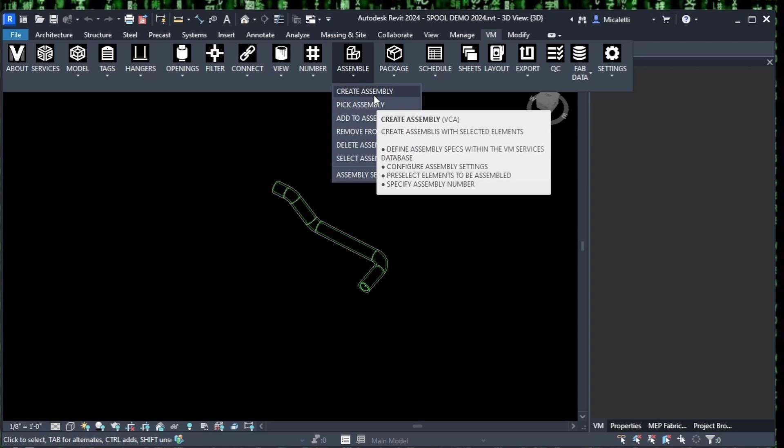VM does give you some more tools here. You can create assembly, and that's just box stuff, and create assemblies out of boxes. Pick assembly allows you to just pick along the run, and then it'll create assemblies for you. You can add to assembly, remove from assembly, delete, and select, and then there's some assembly settings here.

Now, what this is asking you is, what do you want the VM assembly tools to do? Do you want them to make proper assemblies, or do you want to make parameter-driven assemblies? There'll be more parameter-driven assemblies in here next update, but right now you can make a sub-assembly, and this is not really an assembly, it's a parameter-driven assembly, which is useful for certain things.

I accidentally escaped out of that. Let's go back. We're going to make proper assemblies for now. Now this is include taps. So when you're picking along the trunk line, do you want to include the taps without picking them? And for ductwork, generally you do. If you're making assemblies out of ductwork, you probably want to cut the taps in and manifold them, so that's checked. Exclude end couplings. This is basically field welds.

So when I pick two ends of pipe and then I keep going on to the next one, the weld between the two assemblies, leave those out. That's a field weld. That's what this checkbox does here. Also, assemblies are assemblies. They're not spools, so you can make assemblies all day long, but when you make MAJs, CADmep, CAMduct, and ESTmep, they don't know what an assembly is. But CADmep, CAMduct, and ESTmep does have a value called spool name.

So with this box checked, when you're creating assemblies, it's going to push that assembly name to the spool name. So now CADmep, CAMduct, and ESTmep are aware of your Revit assemblies. And then as you're creating them, you can override fill color and stuff like that, so you can visibly see where you've been and what you've spooled.

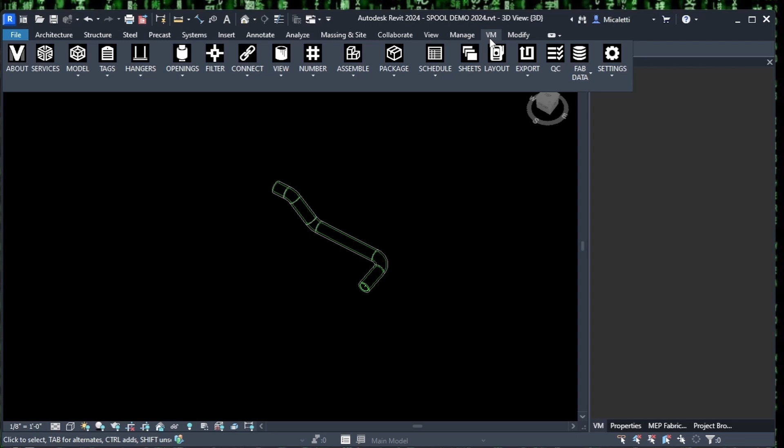So now that that's done, remember I set a max of 10 pounds. And for assemblies, this is dry weight. We also do hanger loads, which I can show you later if you want. But hanger loads is wet weight for pipe, so that's also important to know. We're going to go ahead and create an assembly. We're going to pick assembly, and this is process cooling, we'll say. So PC1. We'll start with PC1. Select OK.

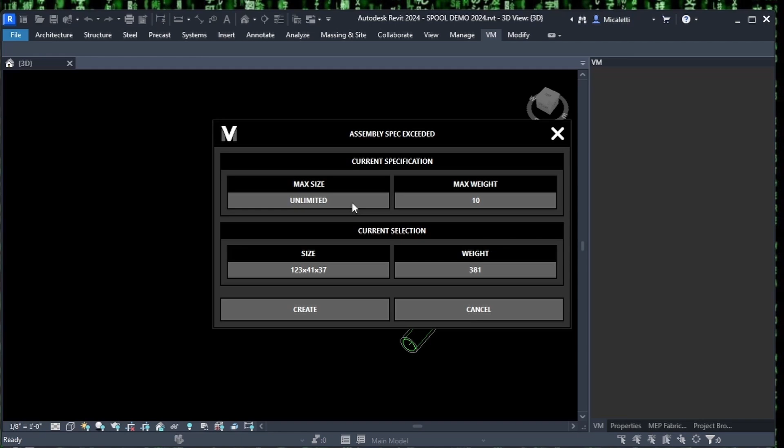We're going to go from here to here. Now, assembly spec exceeded. We're getting this warning because max weight we said was 10 pounds, and it's saying that this is 381. What do we want to do? This would also trigger on size; right now our max size is unlimited. It will give you the size. This is 123 by 41 by 37, in inches. We didn't set a max size, but we did set a max weight. So it's giving us a warning here, and we can create or cancel. We're going to go ahead and create.

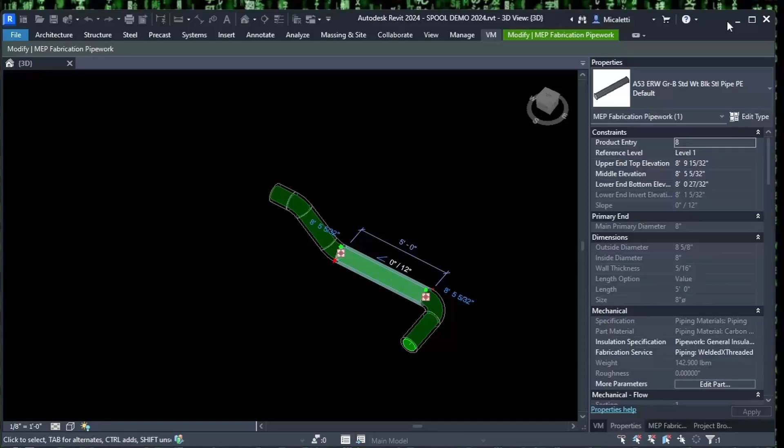Okay, and I could continue picking down the line if I wanted to, but I just hit escape. And if we look at this, we can see that's made PC1. Now let's turn off that ridiculous weight. 0 is unlimited. So we're going to go ahead and say that. And let's make some duct spools now.

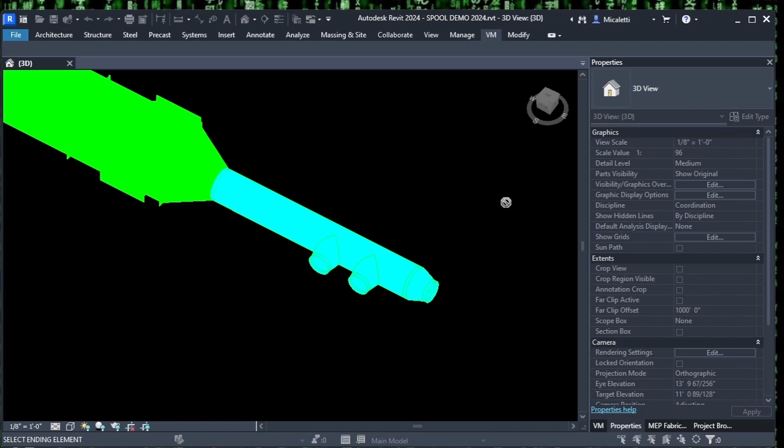So now that that's done, we just need to make some sheets. So what we can do here is select pipe, come up to the sheets. The first thing it asks is, what do you want to make sheets for? So we can make sheets for our proper assemblies, and then remember the parameter-driven assembly. We can make sheets for those.

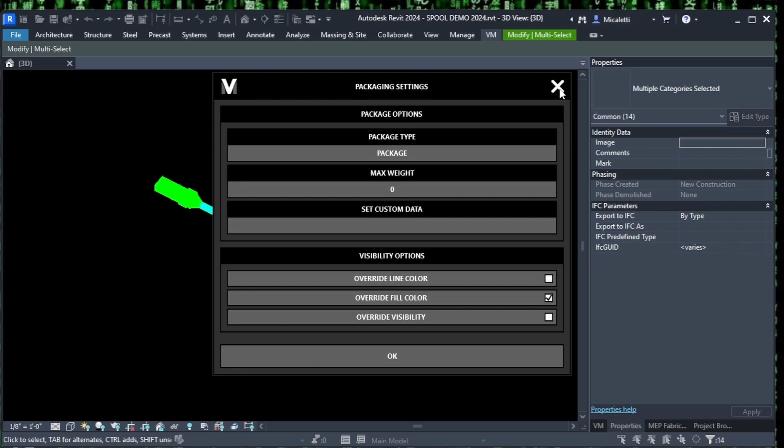And then we have packaging tools as well, which are similar. We have assembly and then package, and these are similar, and you have some packaging options here as well. And sort of a package is just some portion of some model. Could be a riser, could be a chase, it could be 10 spools, whatever you want.

This gives you a way to package up your project and organize it really quickly, and then you can create sheets out of packages. You can select single packages and all kinds of cool stuff there. But we're going to go ahead and select this. Go to sheets. We do want to make a sheet for an assembly, and there's lots of setup here, but basically you can create as many views as you want, and you can create as many schedules as you want for each sheet, right? And then you can set up sheet titles and stuff like that.

Select your title block. This is just the title block family. Your company's standard title blocks will be here if they're loaded into the model, and you can pick them here. Now, once this is all set up, say this company does our process cooling like this, and then we save the template. So we're going to go ahead and load our process cooling template. So the people who are spooling, they don't have to set this up. They just need to load it, load the company standard, right? So this is process cooling.

And we can actually edit the sheet parameters here. Approved by, checked by, designed by, drawn by. These are just parameters that come out of the box for sheets, but you can add more parameters to sheets. And if you did, they'd be here. And you can set your own custom parameters for sheets here, and it'll set all those. So say you're driving some fancy stuff on your title block based on these parameters, set them all up in here, and your title block will be all nice the way that you want it to work. Prefix and suffix are not necessary.

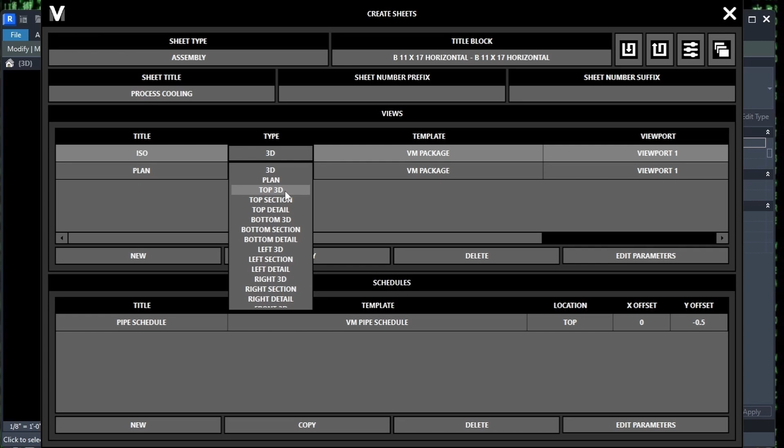Now you can absolutely just use sections and details and stuff like that. But also, if you did want a top view, you can use the top 3D view. So you're getting a plan view, but it's still got all the flexibility of a 3D view, right? If I wanted to plan ISO. But here I'm just going to use a 3D view for the ISO. And this is the view template. Now this is very important. This is just the standard view template.

This controls basically everything. What is the scale? What is the color? What is visible? And if you're familiar with view templates, it's all here. Now I do have one out of the box made specifically for these spools, and you will have as well. So I'm going to pick that. And then viewport, this is just a viewport family. What does the callout look like? Do I even want to see a callout? This is the one that comes out of the box, and there's only one in the project, so I only have one option here, but you will have more if you have more viewports.

And then the next thing is, where do we want this on the sheet? So I want it to line up with the left side. The left side of this view, I want to line up with the left side of my title block. And then I want to offset 2 inches. If you're using metric, this would be millimeters. Y offset 0. And so that's my ISO view.

And then I'm going to have another plan view, except I want it to be top view, but I'm going to use a 3D view. Same template, same viewport, except this time it's going to line up with the right. We're going to offset -2. So that's real easy. And once you get the hang of it, a lot of people, they like to just make a bunch of views and then just line them all up with the bottom right corner, and then they pick the view, right? And then I want to use this view for this spool or this view for that spool.

You can absolutely do that. You can do 100 views and pile them all on top of each other and delete them when you decide which exactly view that you want. So there's that. And views also have parameters.

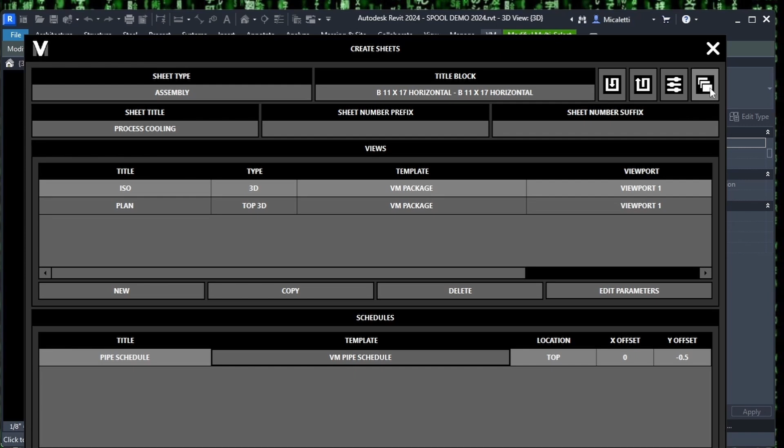Delete that. And then the same thing, what's the title, which template? I want to use the VM pipe schedule template. And where is it? Top of the sheet, the 1/2 inch offset. And now that that's done, if you remember, I pre-selected, so we can just create the sheets.

It has created the sheets for us. If we go to Project Browser, Assemblies, we can see we have the spool assemblies that we made, but no sheets. But then we did create sheets for this. There's that. There's the 3D view. There's the plan view. There's the schedule. And here's the sheet. That's set up exactly how we wanted it to be. Might want to move this down.

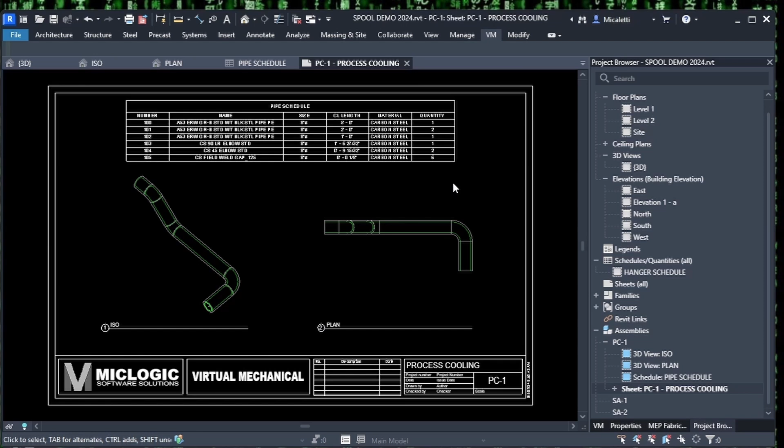So now what I can do is go ahead and detail this real quick. I'm going to select this view, come into here. Now this is process pipe. Say I don't want to number welds, come up here, just give me the pipe work. Now there is no welds in here.

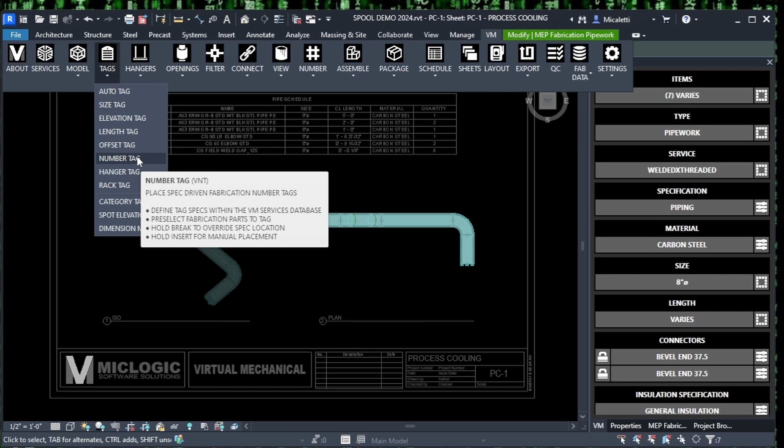Now say I didn't like that. One of the things that we can do is, so that was the spec driven tags. But say I wanted to override. So what I can do is select all this again, give me just the pipe work. Now the override key, it'll tell you here under tags.

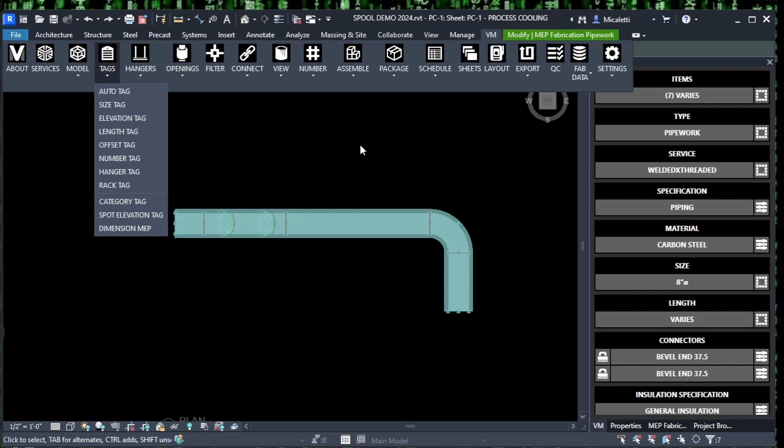There's another tag. So it says hold break to override spec location, right? So what I'm going to do is hold break, pause break, and then type VNT, VNT. And now it's going to ask me, okay, well, where do you want them? This time, put them on the center above with the 2 inch offset.

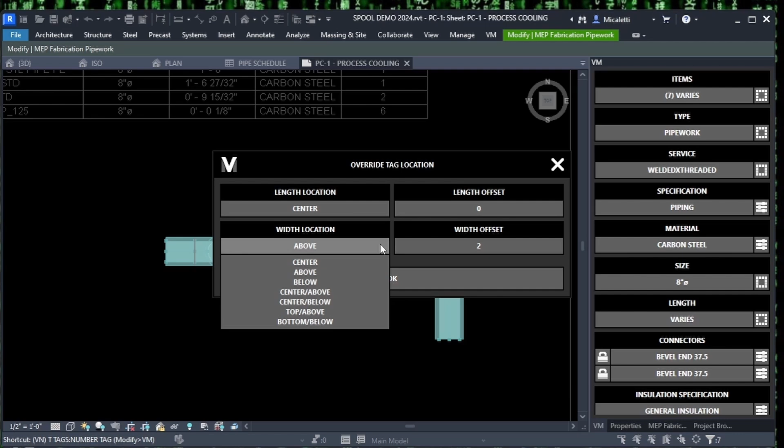Great. Okay. No, don't like that. Undo. Select. Let's go. Pipe work. I'm going to hold pause break. V and T. Give me below. Below center. That's fine. Okay.

We're done with that. Let's click out of here. Double click into here. I'm going to unlock this view. Now, one of the things that we do, it's almost impossible to do out of the box, is to dimension multiplanar spools. But VM enables you to do that real easily.

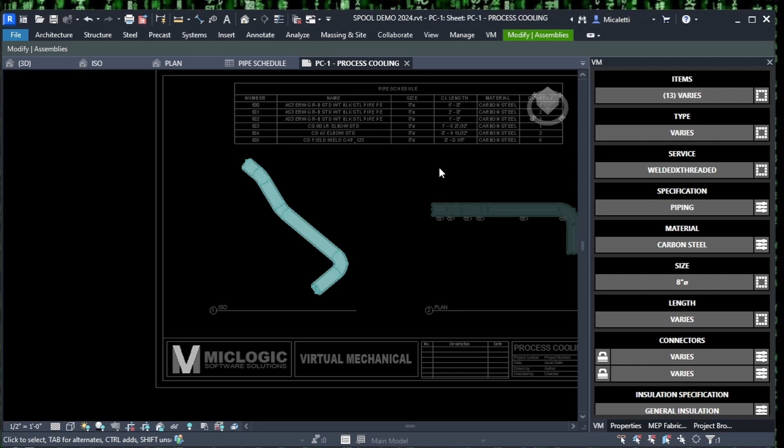So what we can do, we can come up here and say tags, and we're going to say dimension MEP. Create a work plane and dimension through the selected MEP element. So we're going to go ahead and do that. I'm going to select this pipe. We're going to go from here to here.

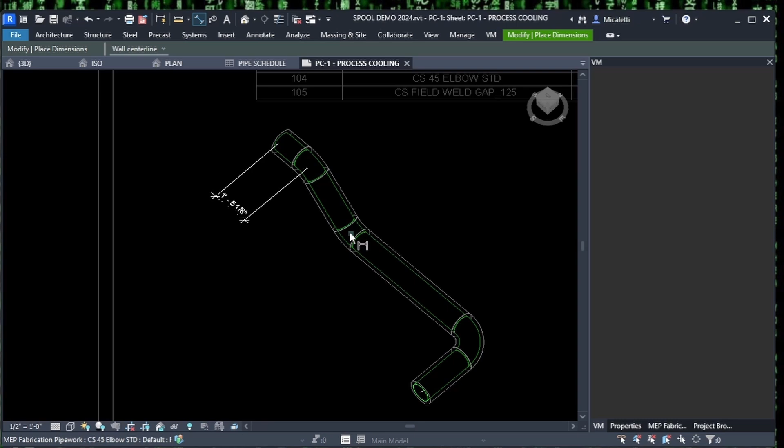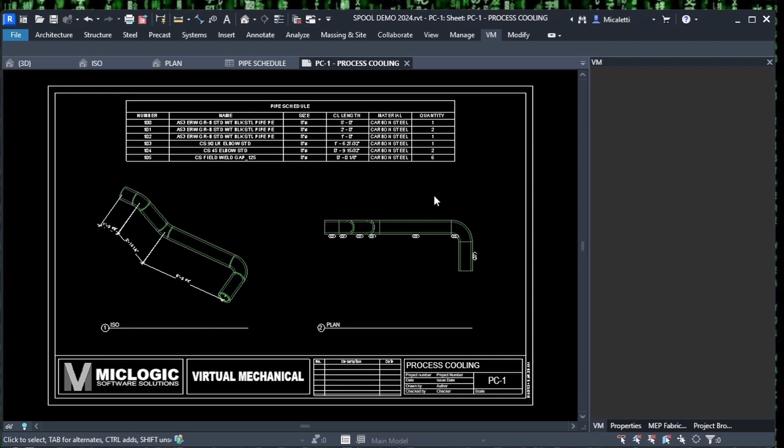Depending on how much you want to detail this, you can go crazy. Go ahead and do it for the duct.

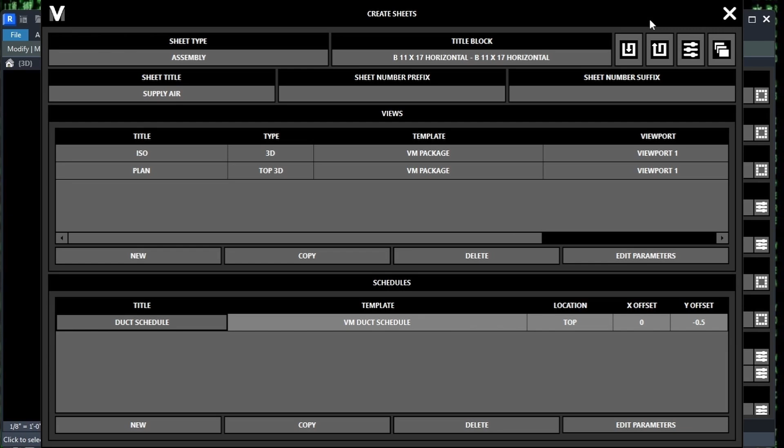This is pre-selected. So we go and create the sheets. Bam, it's created 2 sheets. Yeah, let's say 1. Let's say 2. There, right? And then same thing.

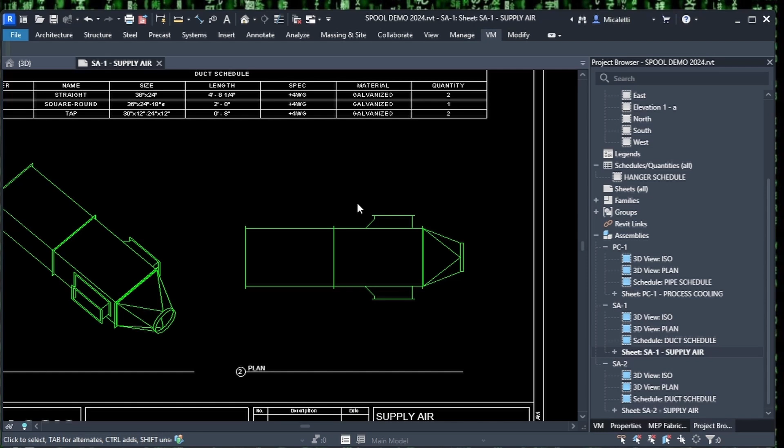We could just detail this real quick. V and T. There we go. For this specific one, I don't need any special dimension tool. I can just use the regular one.

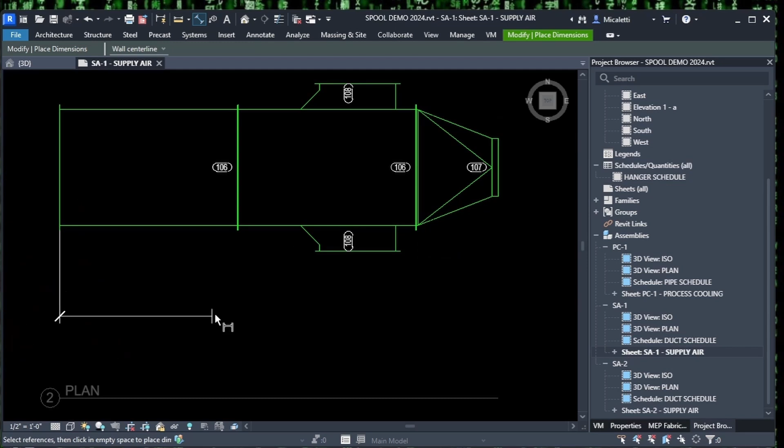Okay. Because it's all on the same plane, right? I go from there. I go to the center of the tap or the edge of the tap. That tells them where to put the tap.

And then this could just be a reference view. You don't really need to put much more than that. That's done. That's built. That's ready to build. Like I said, it just depends on how fancy you want to get with it. And like I said, you can also do big, complex, bathroom details as well. So there'll be a lot more time involved in detailing that out. But you have a lot of cool tools to filter and tag with here.

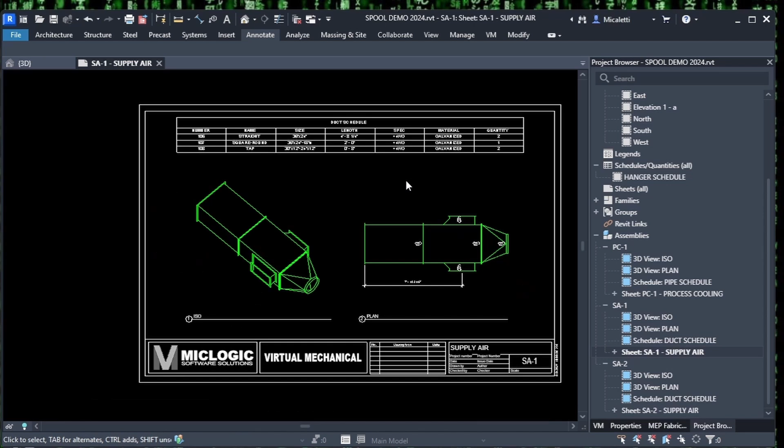Yeah. Any questions? Stephen, could you go through the numbering process? Part numbering? Yeah.